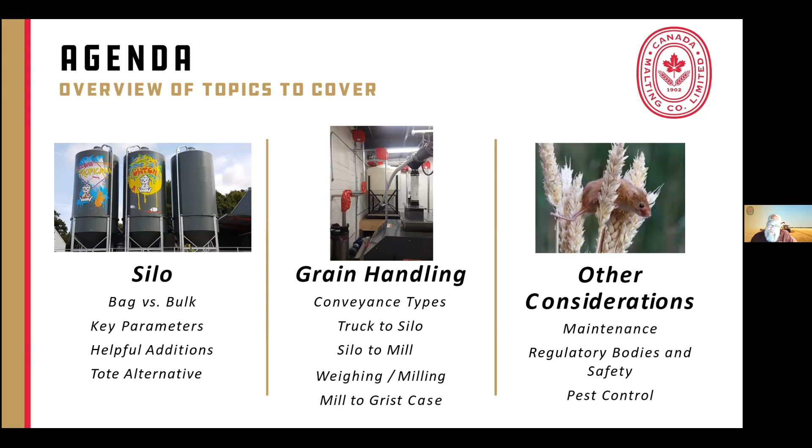So, overview of topics: silo, referring to silo malts or silos exclusively. I know you can think of bulk as totes or super sacks, and we'll touch on those as well. Key parameters, helpful additions, and tote alternatives or super sacks. Grain handling: we'll talk about conveyance types, truck to silo, transfer, silo to mill, weighing and milling, and mill to grist case. And then some other considerations like maintenance. If you're doing these expansions, you need to consider regulatory bodies and safety. And a big thing, especially up here in New York, year round but more so in the summer, is pest control. So silo design and location.

So we have a comparison chart here of bagged malt versus bulk malt. Malt damage pre-milling is very low with bagged malt. With bulk malt, it can be low to high, again, depending on how it's transferred. Milling quality with bagged malt is typically high. Reason being, your suppliers typically have pretty high quality mills. In the warehouses we mill in, we have very expensive 4-roller mills. We're typically pretty consistent with our crush, and I think we do a pretty good job, as I would imagine most

do. And milling quality in the brewery can be low to high depending on the quality of the mill and the settings. It's moderate and easy with bagged malt. Moderate and high can be complex with bulk malt. Dust and housekeeping is an issue, especially with bulk malt, not so much with bagged malt. Equipment maintenance, there really isn't any with bagged malt, but lots of equipment to keep an eye on and maintain with delivery systems from a silo, hoppers, mills, et cetera.

And labor, physical labor with bagged malt is high. With bulk malt, it's low. It's automated conveyance, et cetera. As mentioned before, OSHA involvement with bagged malt is really not much of an issue. It's low with bulk malt, but we're seeing more and more intervention, at least before the pandemic.

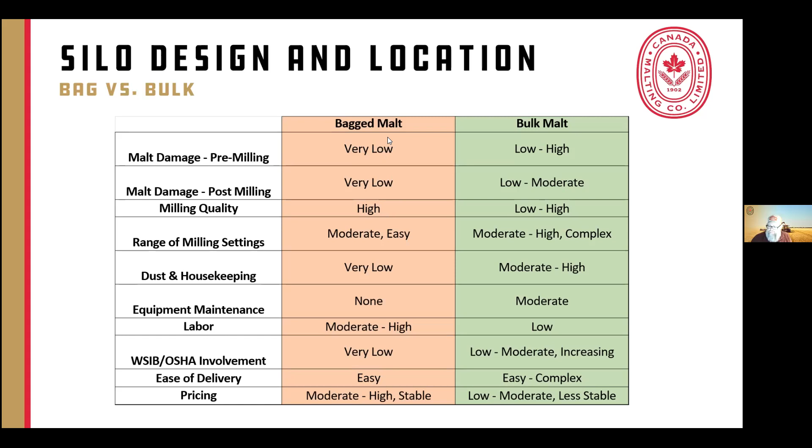Silo design and location: a lot of this is really common sense, but you really want that silo as close as reasonably possible to the brew house and the mill. Ideally less than 50 feet away from the mill. You can go further, but it's more expensive with longer distance, not just because of the amount of material, but also the type of conveyance you need with longer runs is more expensive.

Ground level is typically best for a silo, otherwise there's additional conveyance or damage in the case of pneumatic transfer. Typically I'd say 90 to 95% of the bulk malt customers I have fill their silos pneumatically from a truck, by pushing it with air. If the silo is up on the roof, it needs to be pressurized a little more to get the malt up, which causes a little more damage.

On the roof line, I see this all the time. I have customers down in Long Island and near the city especially that want silos but cannot for this reason. There may also be concerns for neighbors. It typically takes a couple hours to unload a bulk load, so if your tractor trailer is pulling up to unload and you're blocking off your neighbors, you've got to take that into consideration.

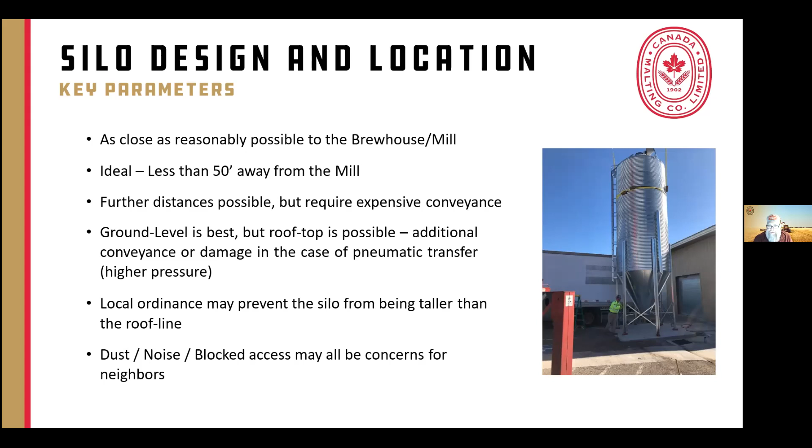Silo capacity. It's a common mistake for those that don't have experience to underestimate how big their loads will be. Typically, our loads are between 21 and 23 metric tons, but we really recommend extra capacity of 15 to 20%. There's a couple reasons. One, when you pneumatically blow malt into a silo, you have a 30-degree inverse cone that forms, so it's not flat. You need space to accommodate that as the silo gets close to full.

Secondly, if your silo is not completely empty, there's malt left over from the last load, which is not ideal. We like to see silos emptied every time if possible, but we understand that's not possible all the time. So we say about 60,000 pounds minimum, or a capacity of 1,700 cubic feet. You want to size the silo based on bulk malt density, which is approximately 34 pounds per cubic foot. So if you do the math, you can figure that out.

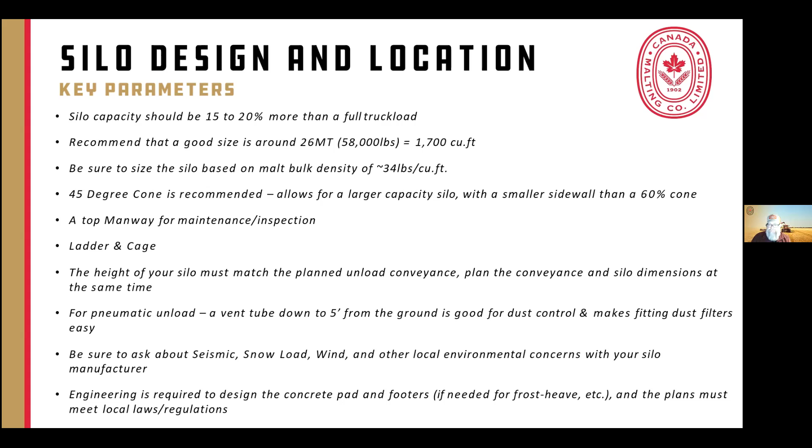So designing location, again, straight walled silos are better than bolt together corrugated silos, but they are more costly. But the straight steel side, low maintenance, much longer lasting. Especially considering in a maritime environment where it's very humid. The straight walled silos are completely contained and sealed, whereas corrugated bins are, again, bolted together. There's gaskets involved. The gaskets can fail over time, need to be replaced.

So moisture can get into the silo. Bugs can get into the silo. All these things cause huge issues, obviously. And also, the corrugated bins are not straight. So the dust can build up in those ridges and cause problems down the line as well. But again, corrugated silos are much more affordable.

Brewery logo is cool. A lot of people love adding a logo to their silo. It's like a big sign to their brewery. But again, it's really difficult to do that. Not impossible, but difficult with corrugated bins. With the straight walled steel bins, it is much easier. We don't recommend load cells on a silo. It's very expensive, and we'll get into that a little more later as far as accuracy as well.

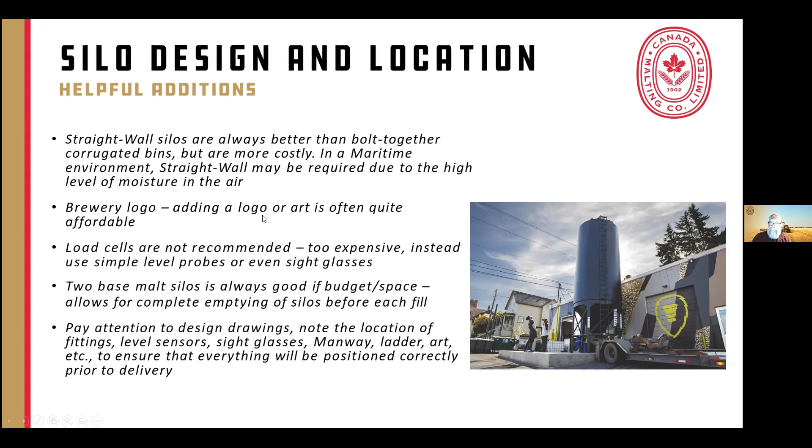So totes, you know, with the cost and complexity, simplify their malt handling. I actually just wrote an article on this, which should be posted on the Country Malt website sometime soon. But I see a lot of times a small brewery that's had some success and they want to jump right up to a silo. And that could be possible for them, and they may be able to maintain the cash flow that's required, $16,000 to $20,000 per load. So you need the cash flow to maintain that possibility.

And totes are really a great stepping stone. I push a lot of these breweries to consider a tote station and totes. Tote stations consist of a frame that holds a 1 metric ton tote or super sack. You usually can add batch weighing capacity to that tote and conveyance to your mill. And it's a lot less expensive than a silo. I mean, you can actually get a real simple tote rack for a few thousand dollars.

If you want to build a really nice system where you can convey your malt from the tote into your mill, etc. With Country Malt too, blend totes are also available. I'm sure the other suppliers do this as well, where we can basically put your recipe into a tote. So it's literally just dump your tote into your mash and brew your batch of beer for that particular recipe. Further simplifies brewing, obviously.

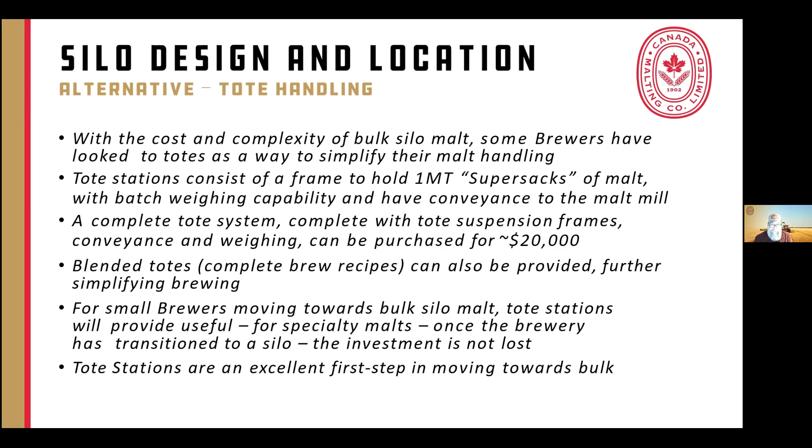So we're going to talk about conveyance. All methods of conveyance damage malt to some degree. The key is really to find the balance of speed, moving the malt quickly in a manner that only results in minor damage. And obviously, we all need it to be as affordable as possible.

So pneumatic conveyance, as I mentioned before, is typically the way that we most often see trucks loading silos. The grain is suspended and moved by a fast flowing stream of air within a metal tube. High damage due to high velocity, impact of grain with the walls of the tube, and especially the couplings and the fittings. I recommend that when you're designing your silo location, a semi can pull up to the silo as close as possible.

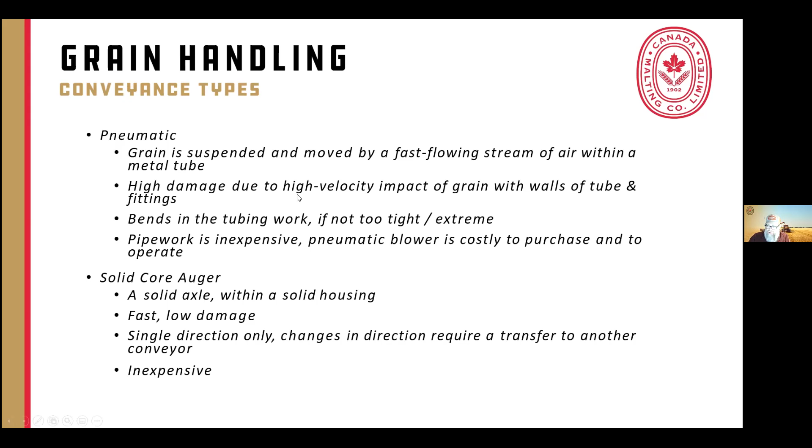Having a pneumatic blower and pipework in the brewery, I think I've only seen it once or twice. It's costly. There's a lot of maintenance with the blower. Not the ideal situation. Augers, obviously everybody's aware of, are another option, and there are different kinds. We have a solid core auger with a solid axle in the middle and a solid housing. They're fast. They don't damage the malt a whole lot. The cons are you can't really bend them, so it has to be straight shots all the way, and changing direction requires a transfer to another conveyor, but they are relatively inexpensive.

So flex augers are a hollow core auger. It's basically a screw inside a PVC tube. Benefits are they're flexible, so you can bend them to go around curves. They are definitely notorious for high damage, especially when people put them at a high angle. Typically you want to keep flex augers mostly horizontal. We recommend that you don't go over 20 degrees at any angle.

What happens, being that the whole center of it is hollow, especially on a steep rise, the malt just keeps falling back down inside the tube and then gets chewed up by that screw auger, and you really can do a lot of damage to the malt and cause a lot of problems in the brew house. They are inexpensive. I do see them more often than anything else, and they are certainly acceptable for short and hopefully horizontal conveyance, or just very short runs in general.

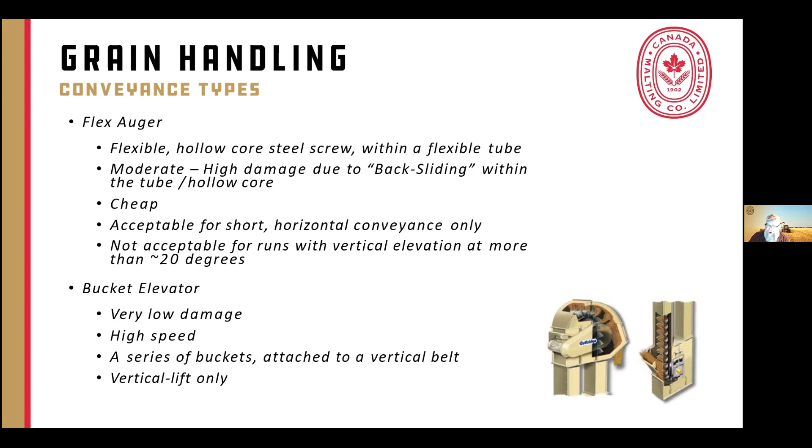Bucket elevators, very low damage. There's a little picture on the right of the slide of what a bucket elevator would look like. I've seen one brewery with these. They're very expensive, there's a lot of maintenance involved, and it's vertical lift only, but the benefit is the lowest amount of damage.

Cable disc: you have chain and disc, obviously, and cable disc. They're more or less the same thing, and there may have been some improvements to these designs, but typically the chain and disc is looked at as a little more robust than the cable disc.

Belts, smooth or cleated belts within an enclosure. These are what we use at all the malting plants. This is how we transfer raw barley and malts from vessel to vessel or building to building. Horizontal and vertical elevation is a little difficult with this type of conveyance, but it's certainly very gentle on the malt, and that's why we use them in all our malt houses. We want to incur the least amount of damage possible at the malt house before we send the malt to you. And they can operate at very high speeds and move a lot of malt in a short period of time.

Obviously, gravity is our friend. That can be one of the best ways to move malt. It's relatively free. It's inexpensive, and conveyance can be minimized or avoided if you can somehow build a system that's layered top to bottom. It's very gentle, obviously, and this is a common way malt houses operate, right? We have these big tall buildings at the malt house. The steep tanks are on the top, and then you go down to the germination beds and then down to the kilns, and it's all done by gravity.

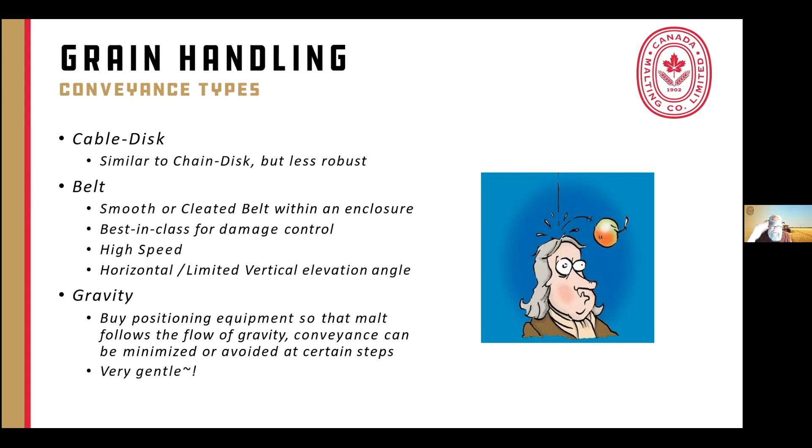Again, conveyance types, a little more detail on the chain and disc. You have the hard plastic discs. They're joined by chain links within a hollow tube. Gentle handling. They can be relatively high speed. The diameters can give you a general idea of how much malt you can move. With a 3-inch, it's 5 metric tons per hour. 4-inch is 10 metric tons per hour. 5-inch would be 15 metric tons per hour. It's kind of a ballpark approximation. Good for changes in plane. They can go vertical, horizontal, any angles.

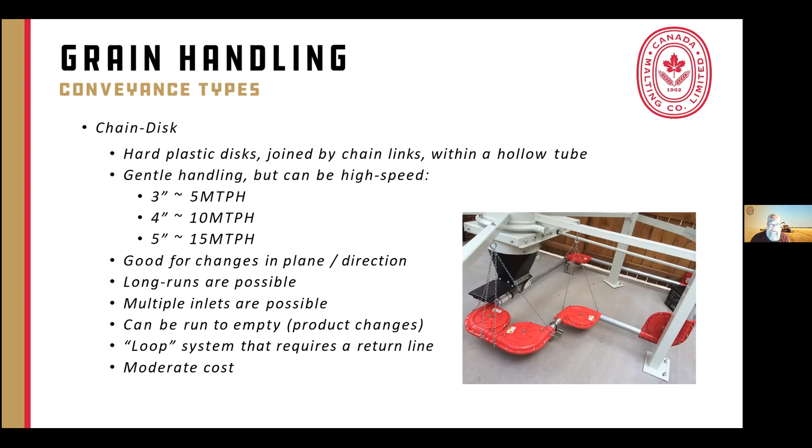Long runs are possible. So if you can't get your silo near your brew house, and this is a common problem, chain and disc is where you're going to want to be as far as transferring your malt from the silo. You can have multiple inlets, so you can add your tote stations, your bag dump stations, all that kind of stuff within the conveyance line, so that you can add your malt at any stage to get to the mill. They can be run empty, but there is a loop system required. The chain has to come back to where it started, so you have to take that into consideration. And the costs are definitely a little bit higher with these systems.

So truck to silo. As I already mentioned, pneumatic is the most common. But again, it does contribute to some damage. We want to limit that damage by keeping the transfers between 5 and 7 PSI. And all our truck drivers for our carriers are well aware of this. Of a bit higher importance is the length of time that transfer takes. Usually it's 70 to 90 minutes. It can be up to 2 hours, typically the longest time for 20 metric tons. Like I mentioned, we are typically around 21 to 23 metric tons per load.

A lot of people think we'll lower the pressure. I've actually had brewers tell the truck drivers to lower the pressure. Their intentions were good. They think it causes less damage, but actually too low of pressure causes more damage to the malt as well, because it bangs around even more inside the tubes. So you need to hit that sweet spot of 5 to 7 PSI. And there are exceptions. There are breweries that have incredibly long runs, and so we have to run it at 8, 9, 10 PSI to get it to work properly. But 5 to 7 with a low to moderate run is the general rule of thumb.

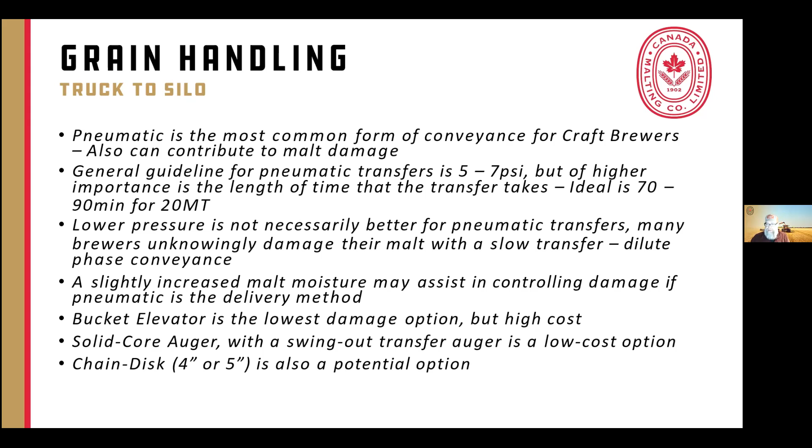Increased malt moisture may not be desirable for the brew house, but it may assist in controlling damage of the malt in a pneumatic delivery system. Not that you want to be adding moisture to your malt. As mentioned before, conveyors and bucket elevators are the lowest damage, but they're high cost, they're bulky, not typically what you would want in a small to mid-size craft brewery. Bucket elevators are typically used in really large craft breweries or places like Anheuser-Busch. Solid core auger with a swing out transfer auger is a low cost option, and chain and disc is also an option for truck to silo.

So silo to mill, we talked about this already a little bit, but the hollow core flex augers are very common. It's what I see the most often when I'm traveling around visiting breweries.

They function, but they can cause a significant amount of damage, as previously discussed. And so we don't recommend them, but obviously we understand costs are important, and they certainly can work if you take the cons into consideration and try to keep sharp angles to a minimum. Especially short runs, they're fine. You can use them for short runs for sure.

Chain and disc is an excellent option. I really recommend chain and disc for the reasons mentioned previously. It can be set up to use the same chain and disc loop for the conveyance to fill the silo as well. A combination of a belt conveyor and bucket elevator, again, is also very good, but very costly and bulky, as mentioned.

For bag malt, you want a dump station somewhere within your system. You're going to want to be able to add your specialty malts. I mean, even big breweries are only adding a bag or two of certain things at a time, especially with your black malts, chocolate malts, and heavy crystal malts, things like that. So you can use a solid core auger or chain and disc or whatever you're using in the brewery for conveying specialty malt to the mill.

And one thing I forgot to mention before that's not in this presentation that I run into a lot is when considering building a bulk malt system and grain delivery system, I think it's very important to make sure there's a way to get grain out of your silo that's not just going into the mash tun. I've seen so many systems, probably the majority of systems people build, there really isn't any way to get the grain out of the silo other than putting it directly into the mash tun. There's no way unless you disassemble the conveyance system. And in my opinion, it's super important for a few reasons.

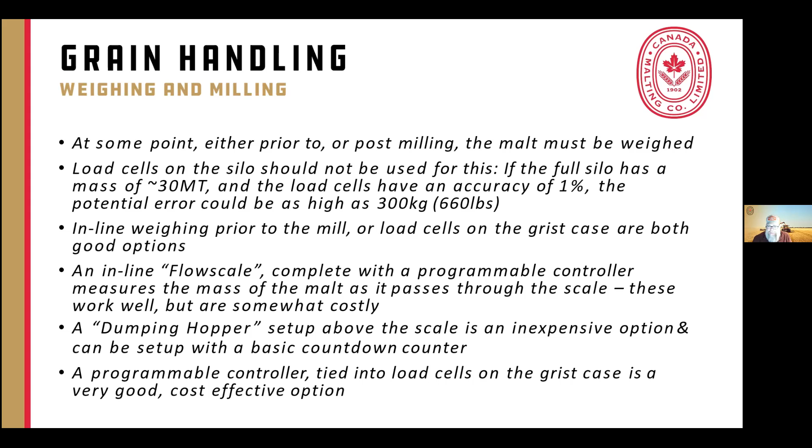A programmable controller tied into load cells on the grist case is really the best option. You just literally have a digital readout. You have load cells on there and it measures out as you're adding malt to the grist mill. Best way to go. When talking about totes, having load cells on your tote station will accomplish the same thing with your tote malt.

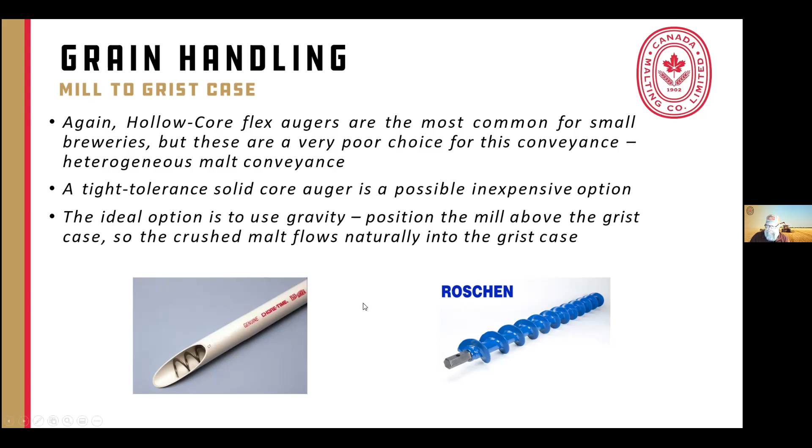So mill to grist case. You obviously want to try to get all your grain milled before you mash in. Mash times are generally pretty quick for good reason, especially with single temperature mashes, which I think are most common. Not a lot of step or decoction mashes going on out there. I'm sure people are using them still, but with how well malt is modified these days, it's typically not necessary. So you want to make sure everything's milled and ready to go in a grist case before you actually start mashing in, if at all possible.

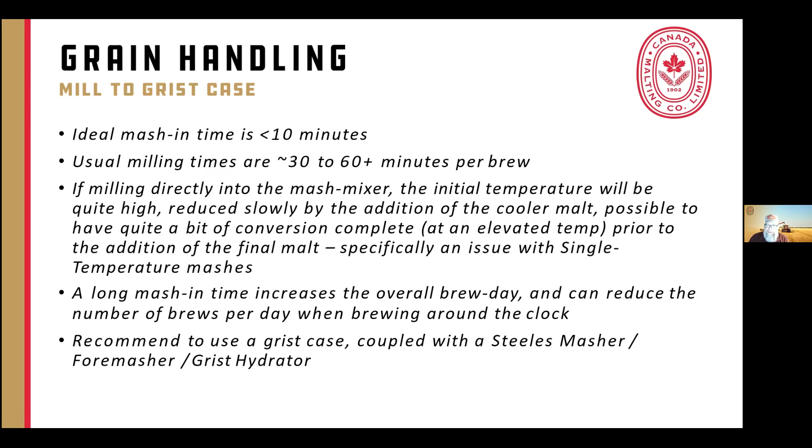Usual milling times are anywhere from a half hour to 60 minutes, depending on the size of the mill, size of the batch, pounds of malt you need to mill, etc. But milling directly into the mash mixer is not ideal because of the time and the temperature effect it will have. Taking longer, the temperature of the malt may affect the temperature of your mash. It also increases the brew day, and we're all trying to be more efficient. Foremasher and grist hydrator are great options as well, as the malt's coming from the grist case to the mash.

So other considerations: the malt handling system at the brewery will require regular maintenance. There's a lot of machinery and moving parts, just like any piece of equipment. Flighting on augers can become sharp over time, which leads to more damage, wear, possible breakdowns, etc. So regular housekeeping is important. Additional cleaning is required from time to time. You definitely have more dust buildup handling bulk malt like this.

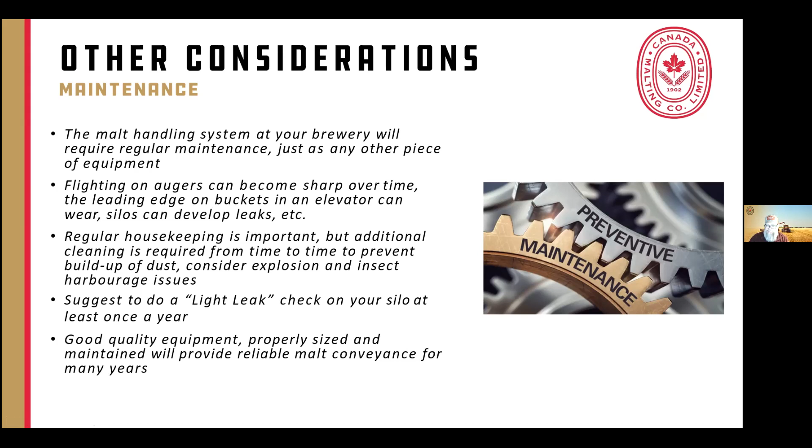Dust explosions are a big concern. You need to make sure you're properly handling your malt in your malt room, as well as the conveyance systems, and keeping the dust under control. Dust buildup in the corners and nooks and crannies of your brewery can harbor insects as well. We always suggest you do a light leak check on your silo once a year. You do that at night with a really bright light stuck through the top manhole into the silo, and do a good inspection to make sure there aren't any pinholes. So good quality equipment, properly sized and maintained, will provide a reliable system of malt conveyance for many years.

So regulatory bodies and dust control: again, it's important to understand your health and safety. We deal with this in the malt house. There are certain lung diseases that malt dust causes. So you've got to take that into consideration and make sure if you're around dust, you're wearing the proper PPE, as well as keeping dust under control for explosive reasons. Dust extraction and collection, we have all of these in our distribution warehouses and at the malt houses, all sorts of filtration. You probably don't have to go that crazy with the volume we deal with, but certainly some systems might be a good choice.

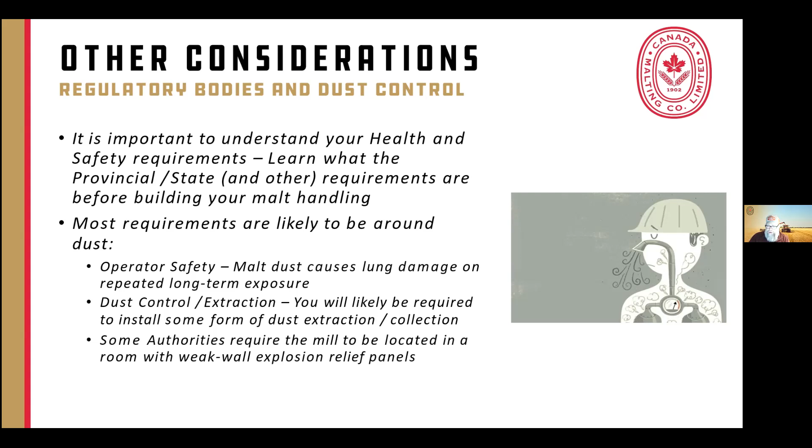Again, you've got to check with your local codes. You know, because it's a milled dust product, there may be other explosion relief panel requirements, stuff like that, that you may have to install.

So good engineering and housekeeping obviously prevents buildup. That's really the key. You want to pay attention, as I mentioned, to those nooks and crannies. You want to pay attention to those hidden accumulation areas. False ceilings, ductwork are big sources. You need to use a Class 2 rated vacuum for dust removal. They're not that expensive. They're a few hundred dollars.

You want to keep one of those in the brewery to suck up the extra dust when you can, when you're doing your cleanup. You want to avoid blowing down dusty areas. Gently sweep and vacuum, for obvious reasons. You don't want to blow it up all over the place. And ideally you want to locate the dust collectors and bucket elevators outside of the building to keep the dust out.

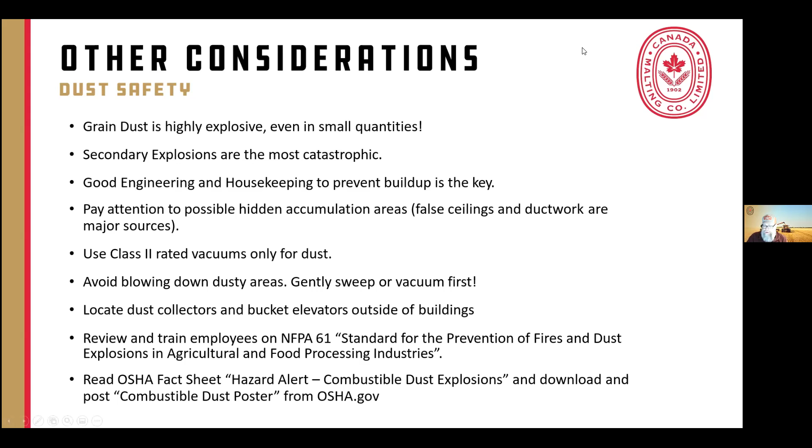Again, talking more about the standard for prevention of fires and dust explosions. There's certain trainings that you can send your employees through. That's obviously recommended, as well as any OSHA information about combustible dust explosions. And you can download all of that from OSHA.gov.

So other considerations are, again, pest control. While maltsters work diligently to provide malt free of pests, it's just literally impossible to stop it from happening at some point. There remains a possibility for pickup of pests during transport or at the brewery site. Also, eggs can actually make it through the malting process. So sometimes eggs are from the field where the malt was harvested, and they make it all the way to the brewery in a bag.

And with your gently kilned malts, it doesn't necessarily kill the eggs. So insects can literally come from the field where the malt was originally harvested. Dark roasted malts are typically not of interest to pests, so there's a little less worry there. If you have a small space for storage, the higher risk areas for pest involvement might be where you want to put the dark roasted malts versus your base malts. And solid adjuncts have much more potential for pests.

That's why we have a return policy on flaked products and some raw products like flaked oats, that type of thing, of only 30 days, because they definitely attract bugs more than regular malt. So good housekeeping and regular maintenance are really key to preventing the ingress of pests. So obviously you want to ensure that silos are capped. You want to make sure they're sealed, right? You don't want water getting in there or pests.